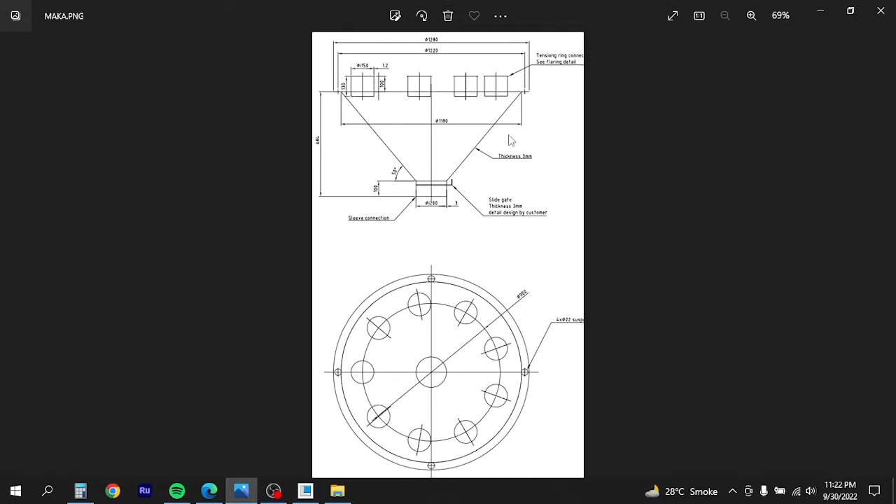Today we are going to discuss how to develop a multiple inlet hopper. As you can see from the drawing, this is our hopper and it has more than one inlet and only one outlet. The idea of this hopper is to collect the product from different points of a bin or any other product source, gather all this product into one hopper, and then discharge it from a single point. This is the drawing for a multiple inlet hopper.

Let's start with the development. This is Creo Parametric 9.0 initial interface. Let's start with new part solid. I will uncheck this and choose MMNS part solid ABS, and I will say OK.

Let's start first with the front plane and I will use the revolve command, and here I will use a center line first like this. Then we will start with the line command and I will prepare a rough sketch here like this.

So this is our drawing. Let's start first with the top cover, whose diameter is 1180. I will take half of it, 1180, so 590 would be the dimension from center to the corner. So this dimension I will change to 590.

Then the total height is 684, and from this point to this point it would be 684 minus 100. So I will take the dimension from this point to this point, which would be 584, and this last one would be 100 from this point to this point. So this one is 584 and this one is 100.

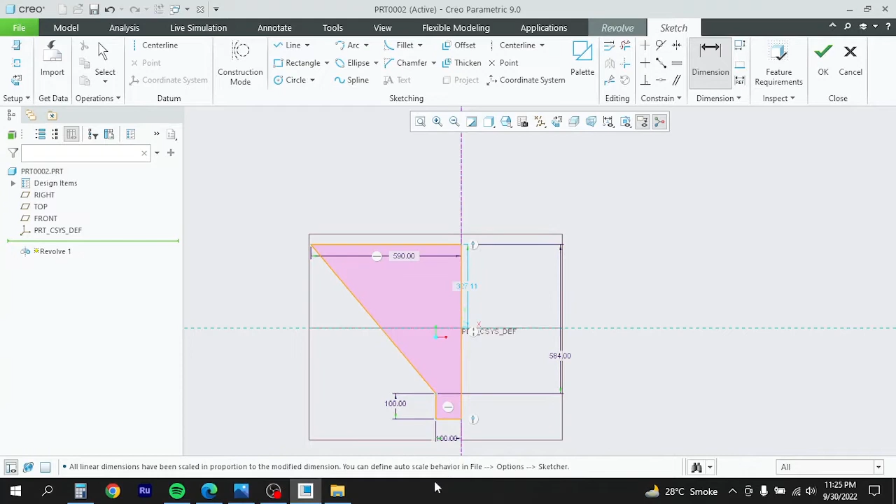So this one is almost complete now. Now I need to see the outlet of this hopper, which is 200, and I will again take the dimension from here to here, it must be 100. So this is now complete, and now I will say OK, and you can see the hopper body is created here, and I will say OK.

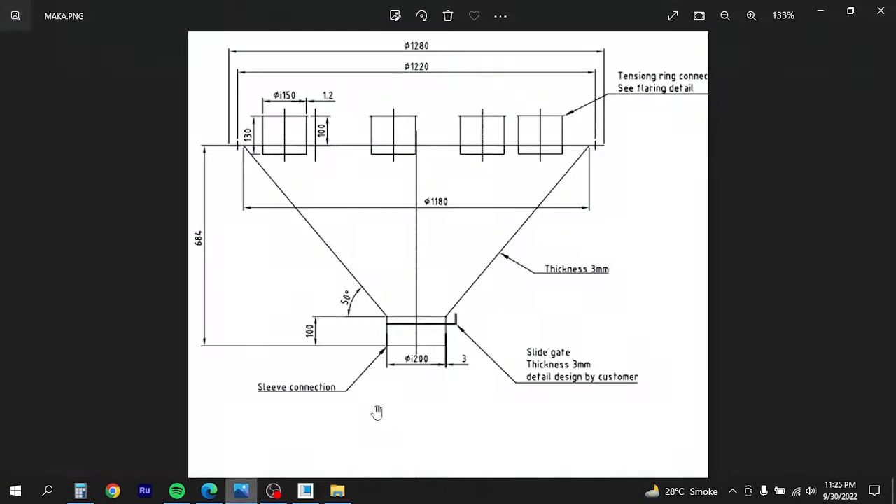Now let's see here, so now we will start with the inlets. You can see we have multiple inlets here, so let's start with the first one. Here are the dimensions: it is 100 outside and 30 millimeter inside. This is the thickness of this pipe, 1.2 millimeter, and the diameter is 150.

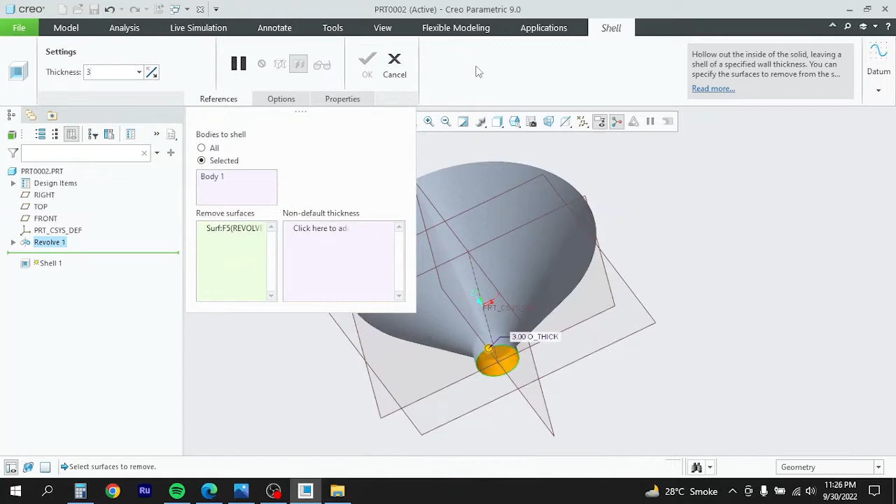So first I would recommend to shell it, and then we will work on the top assembly. First I will shell it from this point, and the dimension of this complete hopper is 3 millimeter. Here I will keep the thickness as 3 millimeter, and I will say OK.

So now you can see it is a hollow body from inside, and from top it is closed, and we will start with the multiple inlets here. So I will choose this plane first, and I will use the extrude command here.

Now you can see from this drawing, at 900 millimeters these holes are distributed. So what I will do here, I will first create the dimension. The diameter here is 900, so from center it would be 450.

So first I will take one circle here, and I will keep its dimension as 900. This will be the center of our inlets. And then I will make a circle here like this, and the dimension of this circle I will keep as 150 millimeter. So this one I can change to 150 millimeter.

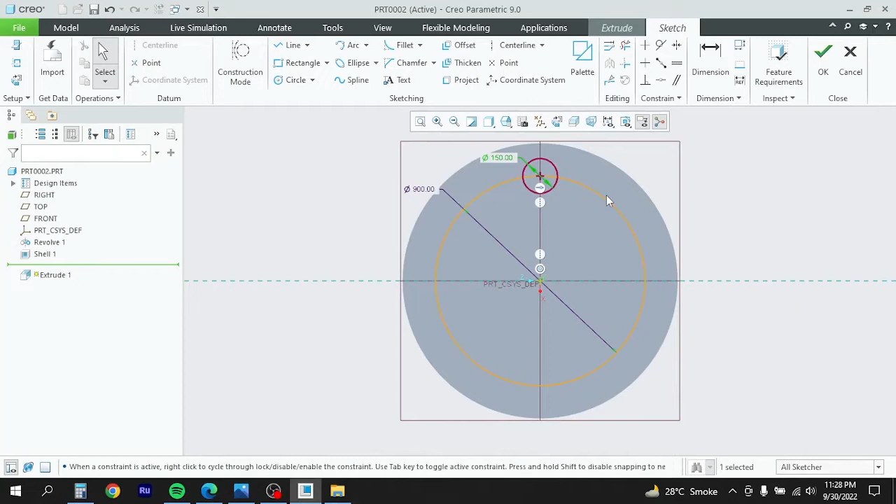So here I will delete this line because I don't need that, and I will use only this circle. So here I will say OK, and you can see it is extruded in the outside direction.

So now I need to know the height of it, which is 100, and the total is 130. So I will keep it as 100 outside and 30 inside. This dimension I will change to 100, and I need this to be hollow from inside, so I will give it the thickness, which is 1.2 millimeter.

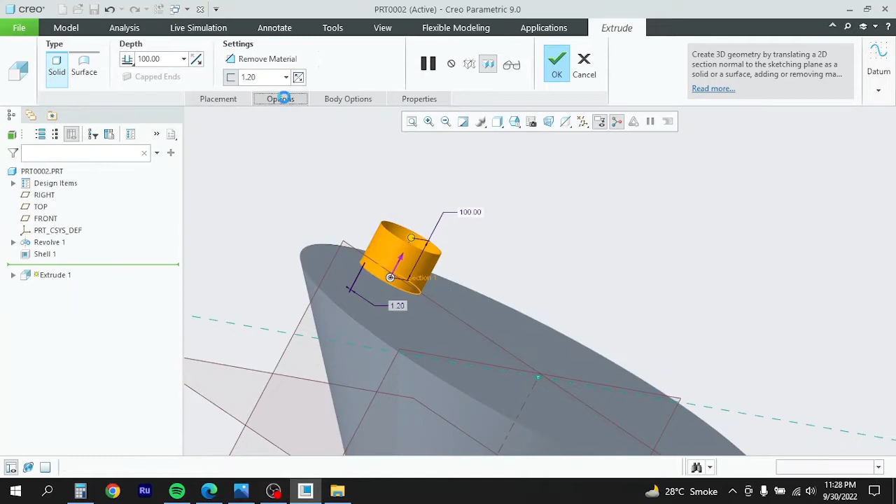Here 1.2 millimeter. Now I need to extend it inside as well, so I will go for option and side 2, and I will choose variable. So here I will give it as 30 millimeter, and I will say OK. So now you can see it is extended outward to 100 millimeter, and from inside it is 30 millimeter. So the hole is created now.

Now I need to make an extrusion here, so you can see the top cover is still in place, so this is actually closed at the moment. Now I need to make an extrude cut on this plane.

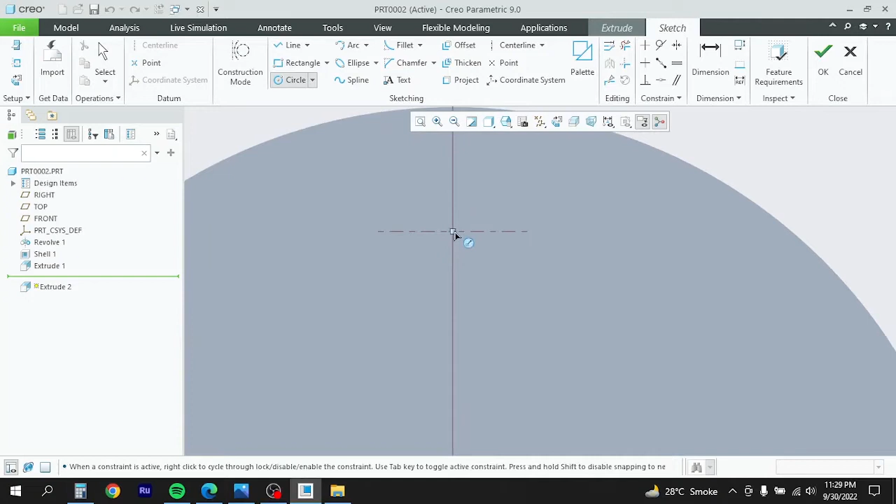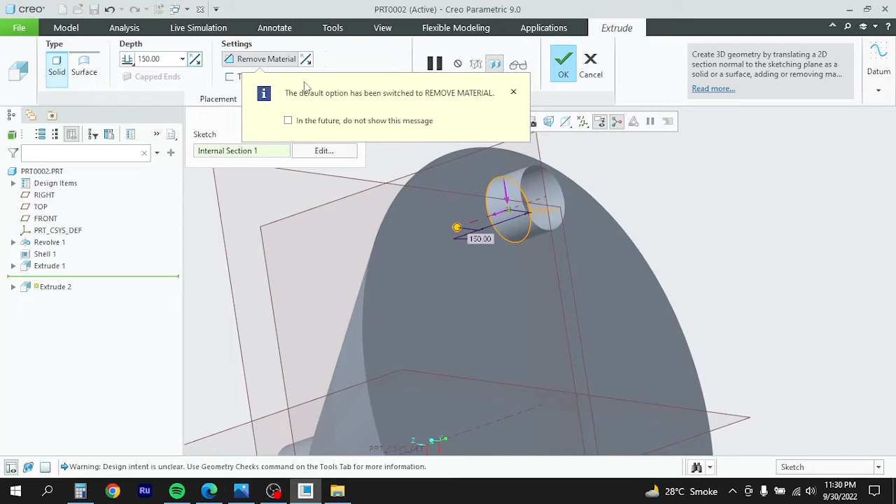I will use the circle command here, and I will make one circle. The diameter of it is 150. So 150, and I will say OK. This one I will flip inside the direction, and I will say remove material.

Okay, so the dimension I will reduce a little bit because the other side is curved. It is actually intersecting here, making a hole here. So I will reduce the height manually because I don't need to go down to the other boundary, I just need to make an extrude cut. This should be fine, so I will say OK. Now you can see the inside is open and the sheet is removed from this area. So this is done now.

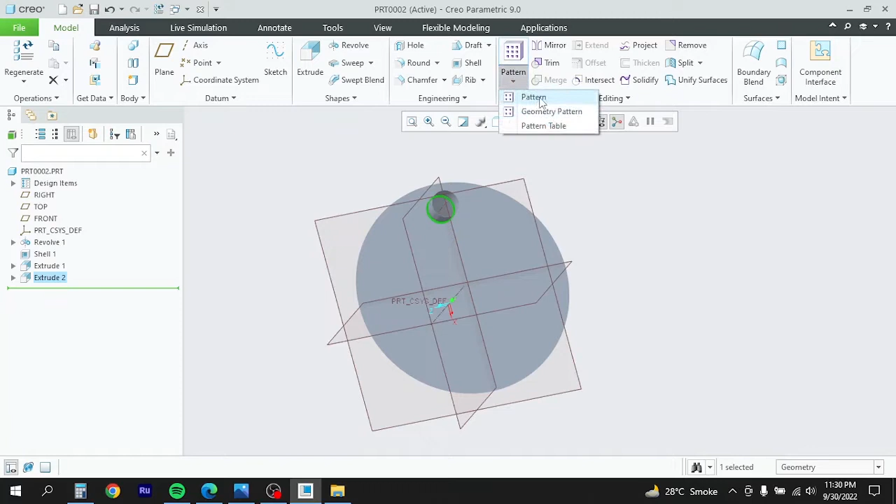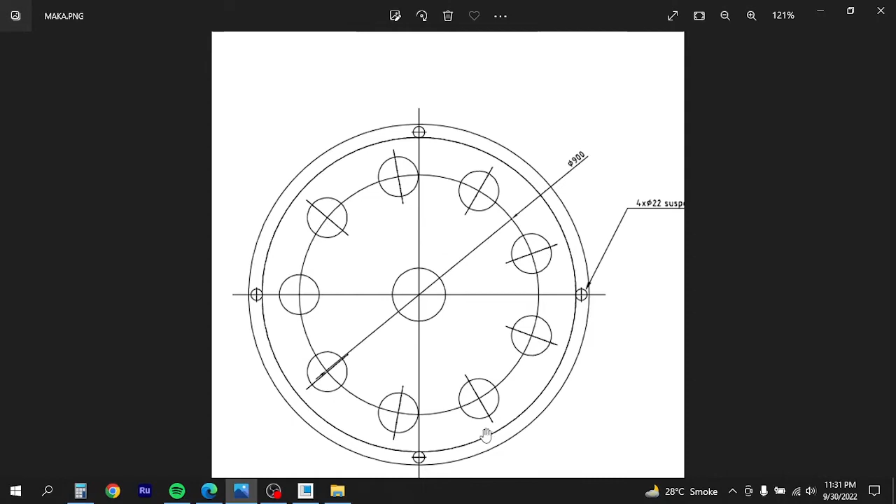Now we will make a pattern here. For pattern I will go to pattern, and the type I will change to axial. Now I need to choose the axis, so this is my center axis. And this I will change to angular extent 360. Now you can see here the number of members: 1, 2, 3, 4, 5, 6, 7, 8, 9. So total we are having 9 holes here. So I will say 9 here, and I will click OK.

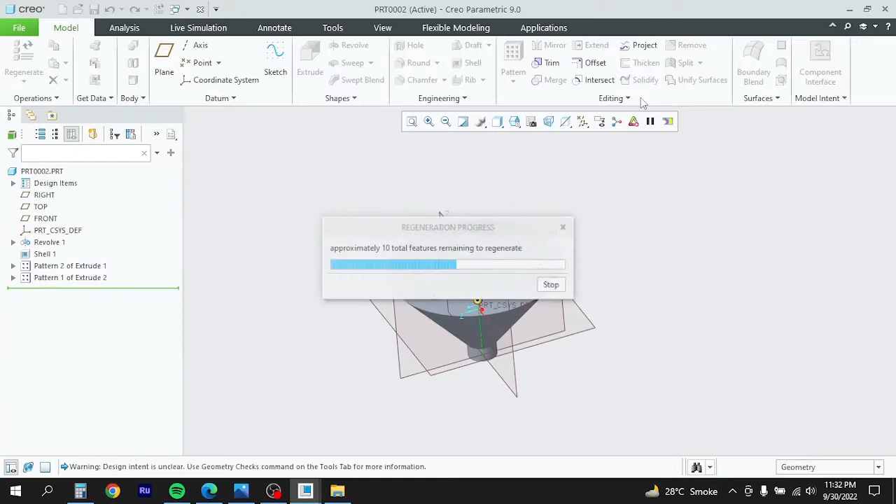Now you can see only one pipe is created and the other ones are not done, because we were doing the extrude command for extrude 2. So now I will choose this pipe, or the extrude 1 command, and apply the same thing. Axis, I will choose the center axis, choose angular extent, and change this to 9, and I will say OK. Now you can see all the pipes are in place, which is fine now.

Now we are having multiple options how to make the assembly from this point. Normally we are having an additional flange here, and we are having three or four supports here to hold this multiple outlet hopper in place. So for that we will make a flange type assembly on the edge of this multiple outlet hopper to place a support here. So for that I will again use the extrude command.

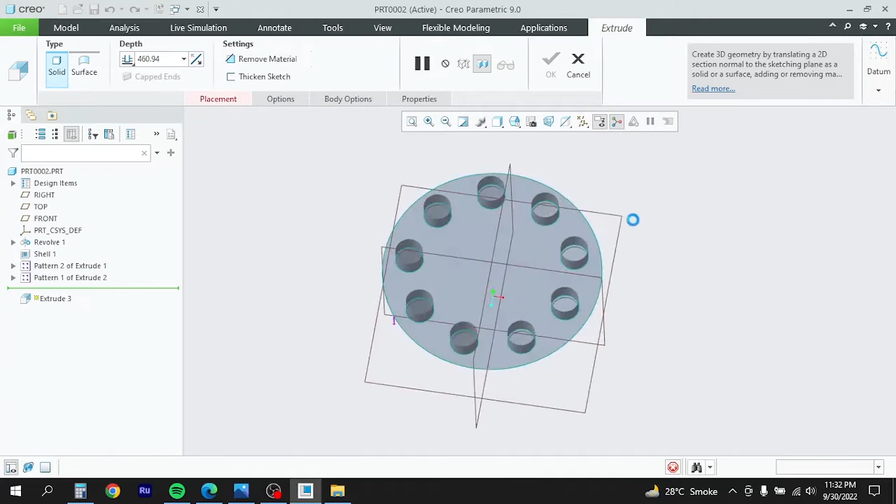I will choose this plane, and here I will draw a circle like this. So the dimension of this circle would be equal to 1180. As I said earlier, I wanted to make it a little bit offset, so I will choose this dimension 1280. The outside is 1280, and I will say OK.

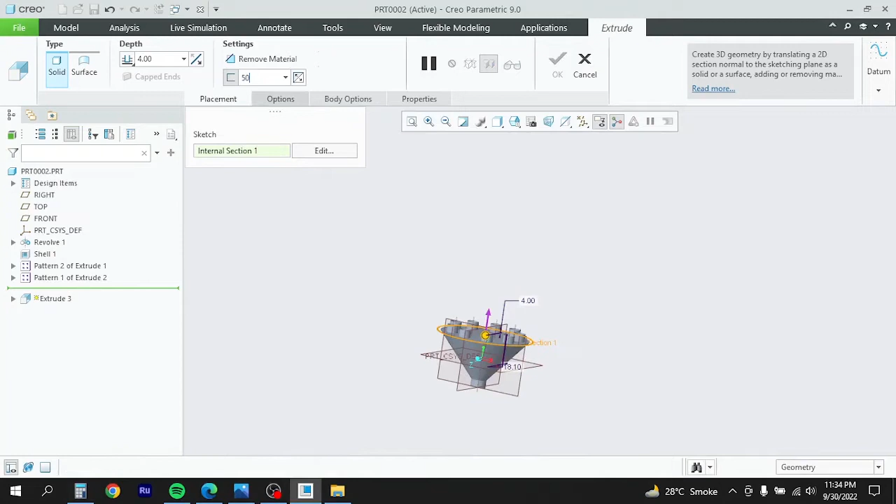So here you can see this is created now. Now this height would be the thickness of my flange, so I will say 4 millimeter would be the thickness of the flange, and here I will choose this one. So 1280 is the outside and 1180 is the inside, so we are having a difference of 100 millimeter, so one side would be 50 millimeter. You can see it is created now on the outer edge of the hopper to hold the multiple outlet in place by using multiple supports here. So this is done now.

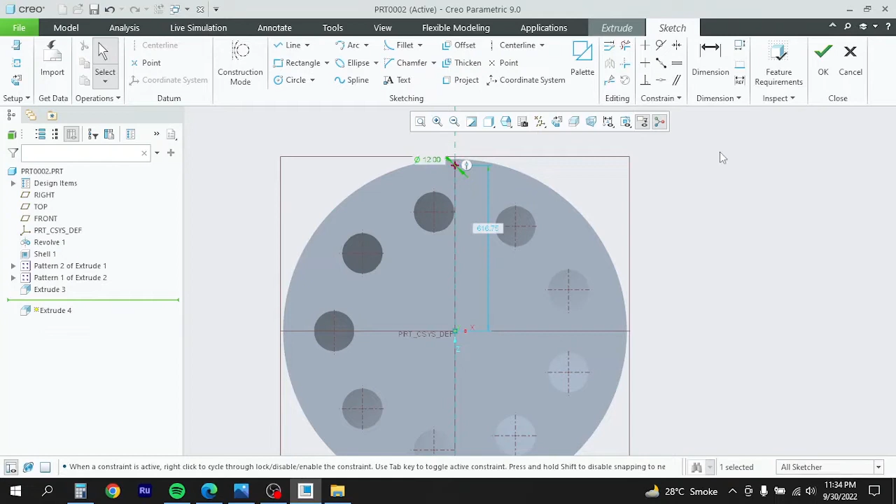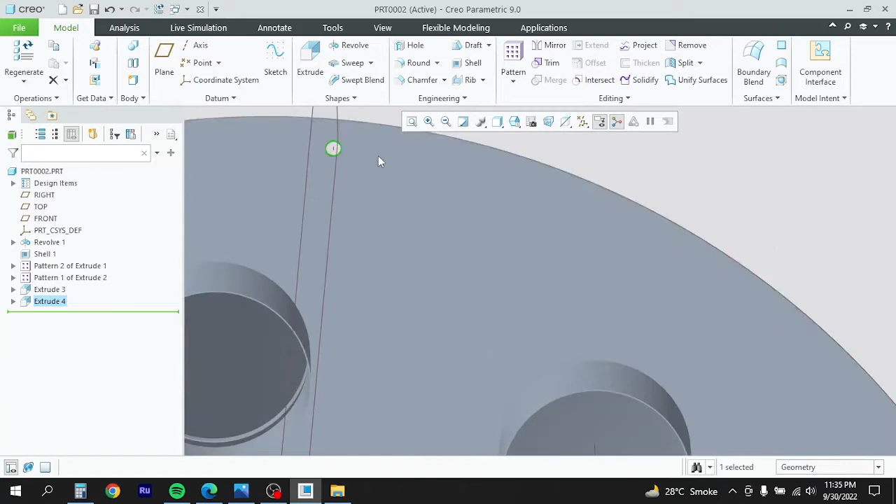Now as I said before, we need to make some assembly here for preparing the supports for this multiple outlet hopper. So again I will choose this plane, and I will use the extrude cut, and then I will draw a circle here. This dimension would be 12 millimeter, should be fine, and I will say OK. So this one I wanted to keep as a hole, so I will flip the direction and remove material here, so which is already chosen, so I will say OK. So you can see the hole is created now, which is M12. So this is OK.

So now I will repeat this as pattern. I will again go to axis, and choose the center axis. I will choose angular extent, and number of members 4 are fine for us, so I will say OK. So now you can see 4 holes are created here.

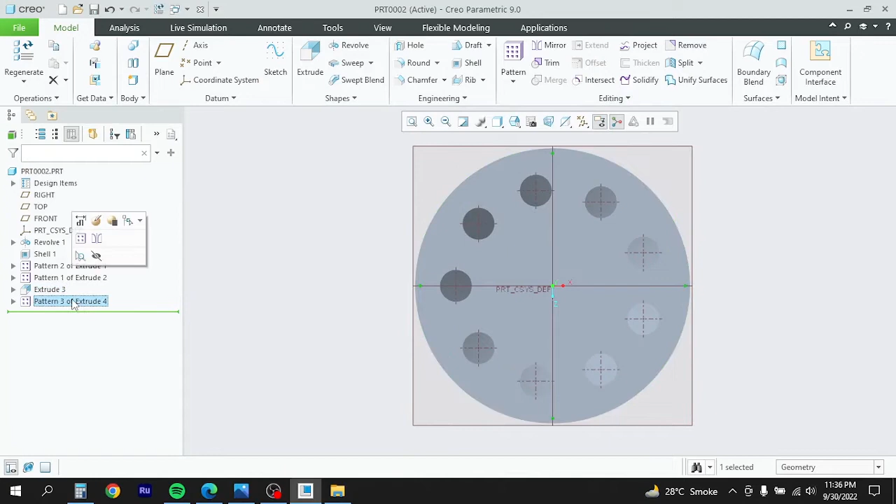Just to have a better overview, I would like to change this hole dimension. This one I will edit the definition, and here... OK... OK. So this is fine, we will keep it like this, and the holes are in place.

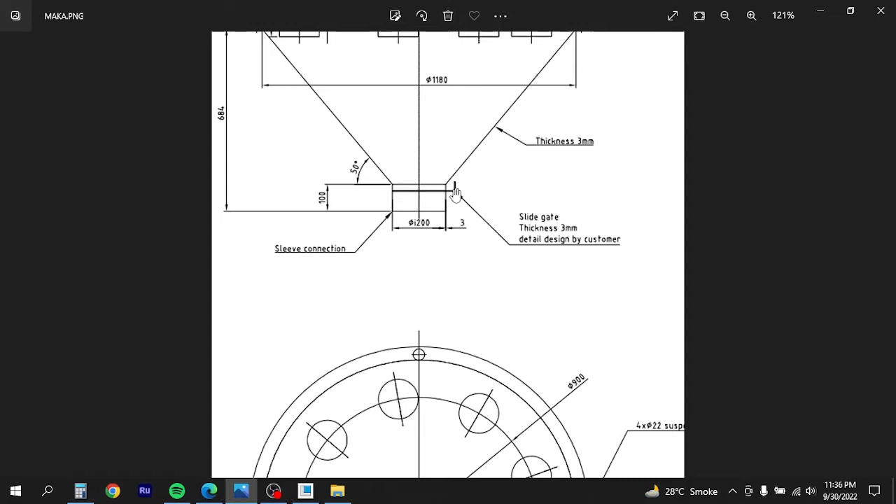OK, so now let's look at the drawings. Here we need a slide gate of 3 millimeter, and it is actually used to open and close the outlet of this hopper. So let's prepare that.

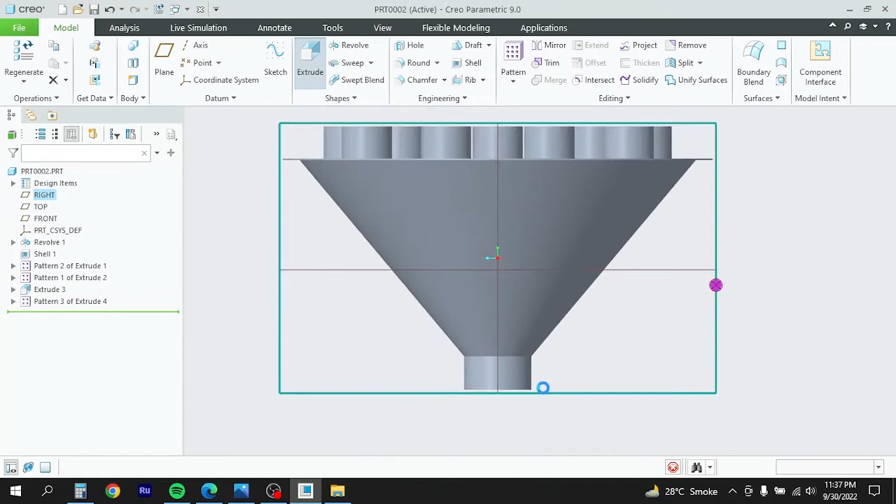For this I need an extrude cut here, so I will choose any of these planes, this one, and I will choose extrude command here, and I will make a rectangle starting from this point to this point. Okay, so this dimension I can change to 5 millimeter because 3 millimeter is the thickness of the plate, so the rest is okay. So I will say okay. So here you can see it is extruded on one side.

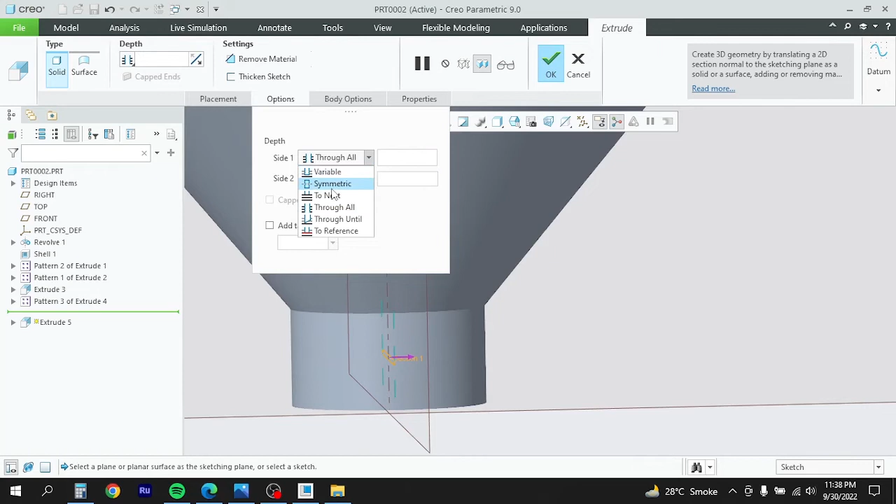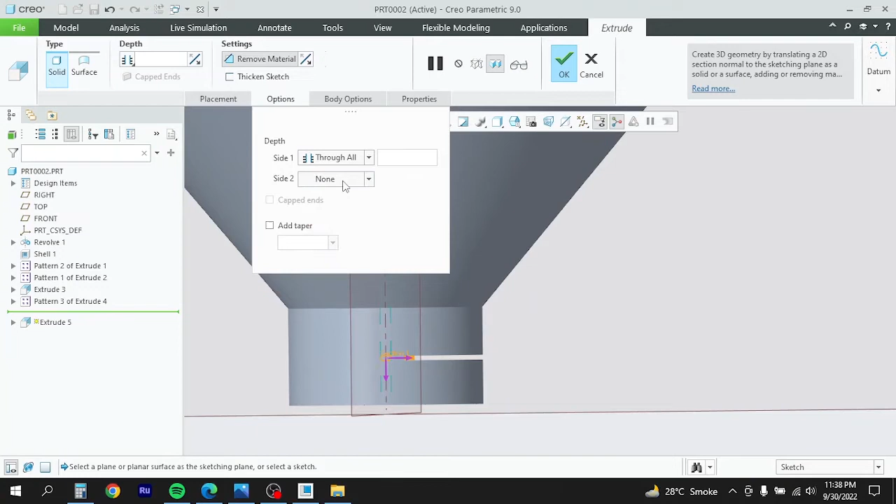Then I will go for option and choose variable here too. And this one I can say to the next, and this one I can say through all. Yes, through all, and I will remove material. Okay, so this one we can set as variable. Okay, so since it is hollow from inside, we will keep it as none, and this one we can say through all, and I will say okay. So now you can see the slot is created for the discharge slide gate. So this is fine now.

Now let's move to the slide gate that we will prepare separately, and we will prepare the supports in another window.

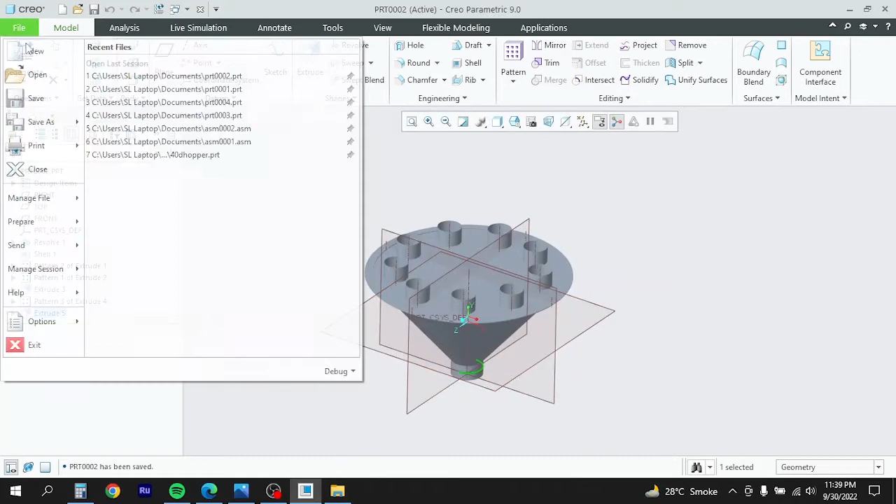Okay, so I will save this at the moment as part number 2. Now I will go for a new part, and here I will uncheck and use MMNS part solid ABS, and I will say okay. Here I will choose the front plane. Simply I will choose the extrude command. From here I need to draw this slide gate.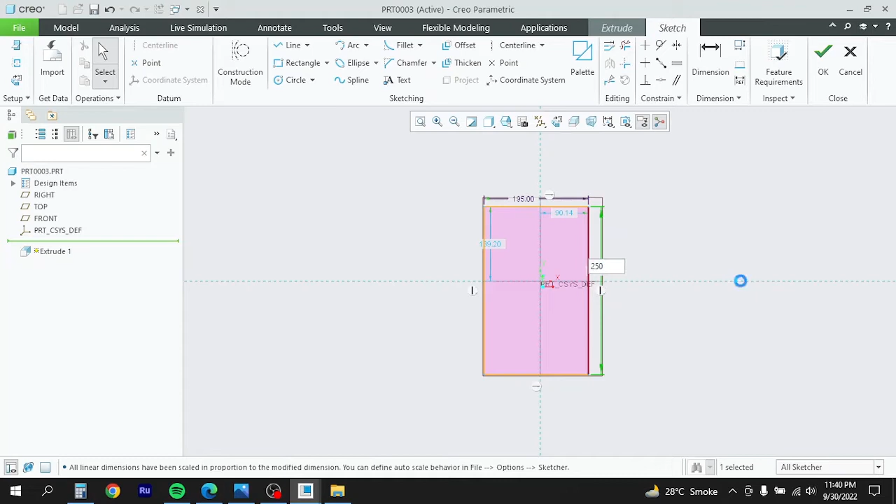So roughly, 200 is the length, and it is slightly outside, so I can say it's roughly 250 millimeters, and then we have a slight bend here. Let's make a rough sketch. This one would be slightly less than 200, so 195 would be the width of that plate, and this one 250 millimeters. I'll say okay, the height 3 millimeters, and click OK. Here you can see the slide is created now.

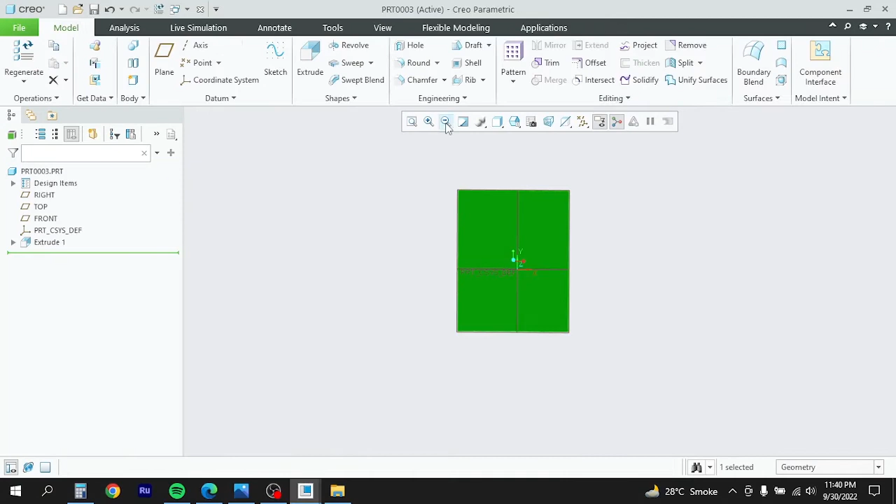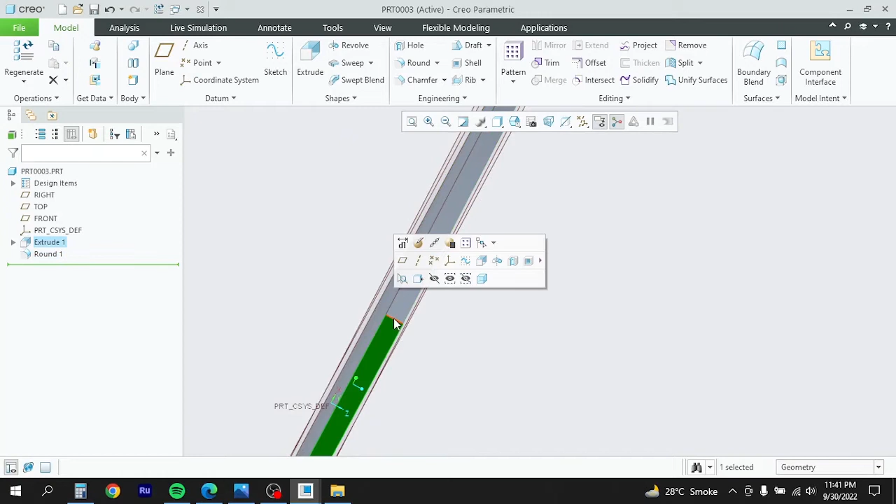Okay, so now we need to round these edges. This one I can choose and say round. This one I can keep as 250 or 200, and I say okay. The other one also, I can choose this point and say round here, again 200.

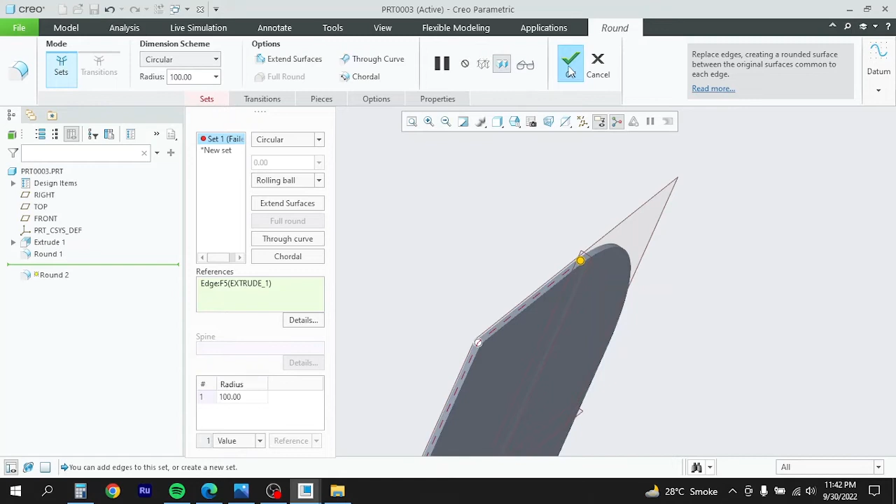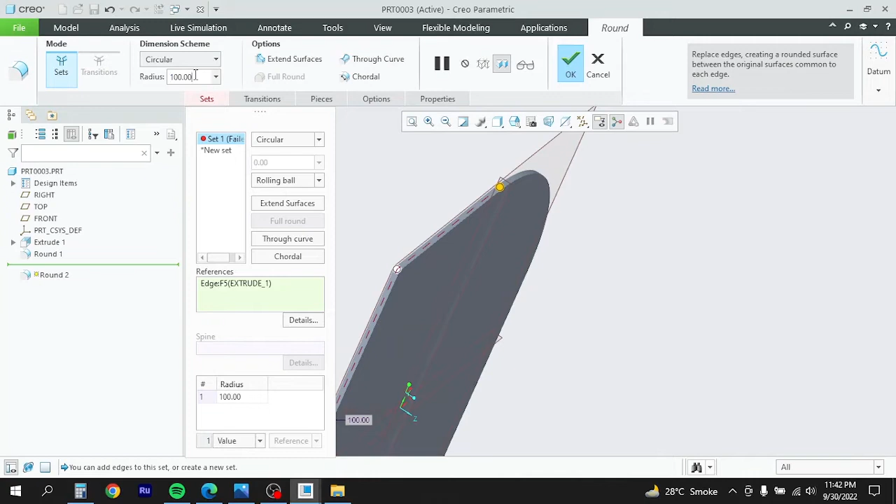Here we need to make a round of 100, and this one also, because the diameter of that pipe is 200, so this round would be 100, which is half the diameter of the pipe. So I will say 100 here, and okay. Now I will round this point again and say 100, or 95. Now you can see the plate is created.

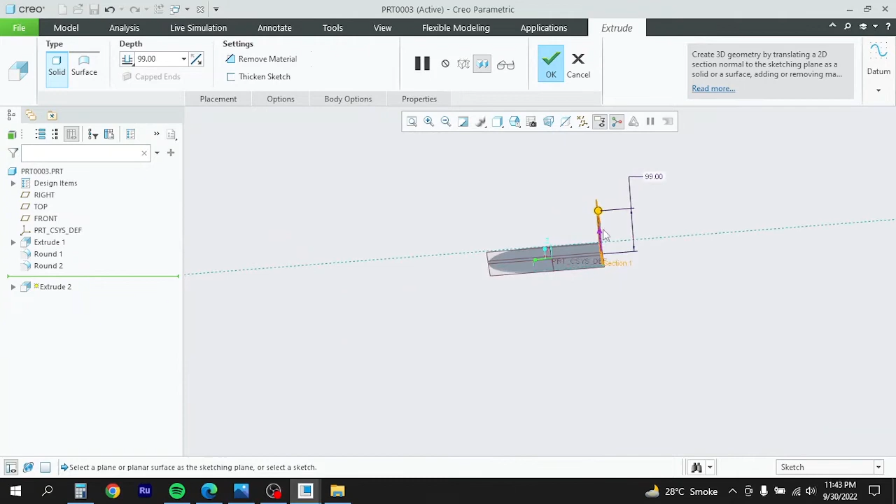Now we need to make an angle here. I will choose this plane, again extrude, and make a rectangle from this point to this point. This thickness I will keep as 3 millimeters and say okay. This one we need to extrude to an optimum dimension, which I can set manually. This should be okay, and I click OK. This is our insert plate, which would be inserted at the bottom of the multiple outlet hopper. I can save this as part number 3.

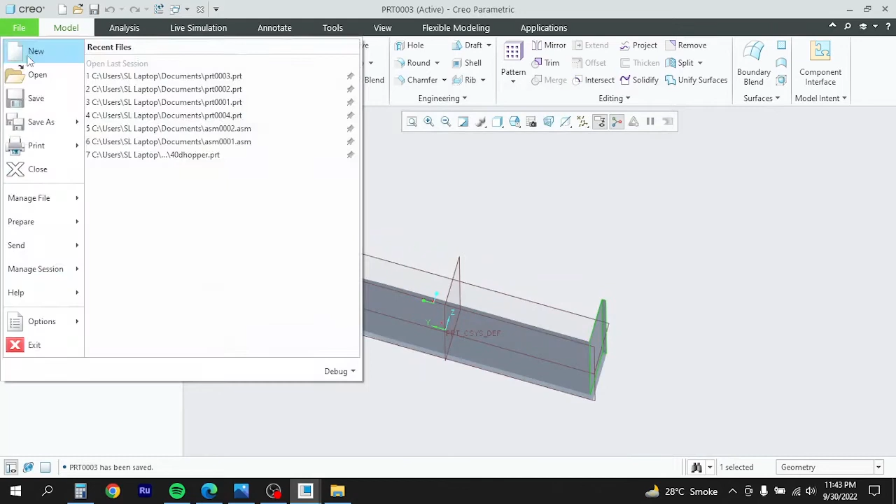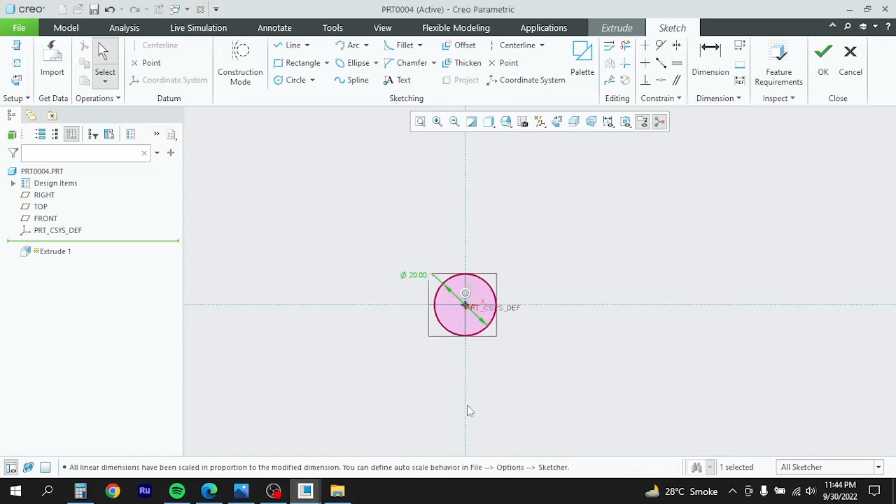Now let's go to the last one, new part solid. Here I will uncheck and use MMNS part solid ABS. Now we need to make the supports of our multiple outlet hopper. I will choose the front plane, again extrude command. First I will draw a circle, with a diameter of roughly 20 millimeters, and say okay. The height of this support I can keep roughly at 1400 millimeters, or change it to 1000 millimeters for better aesthetics. So I will say okay.

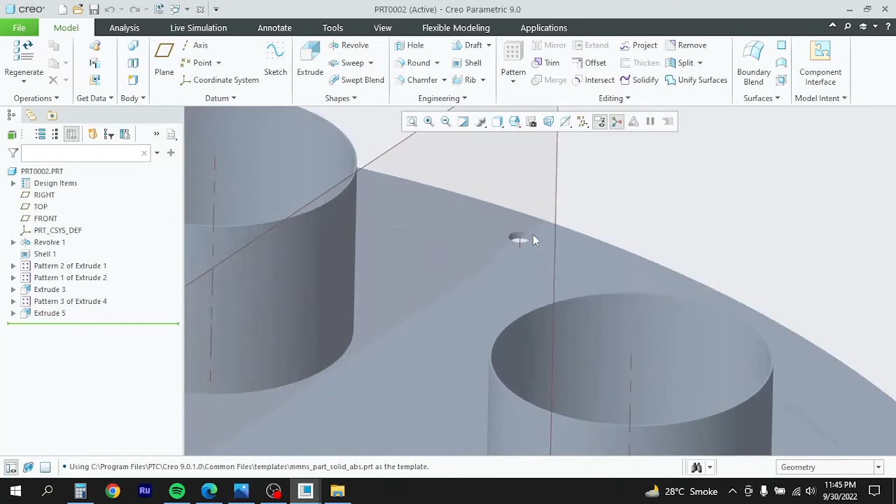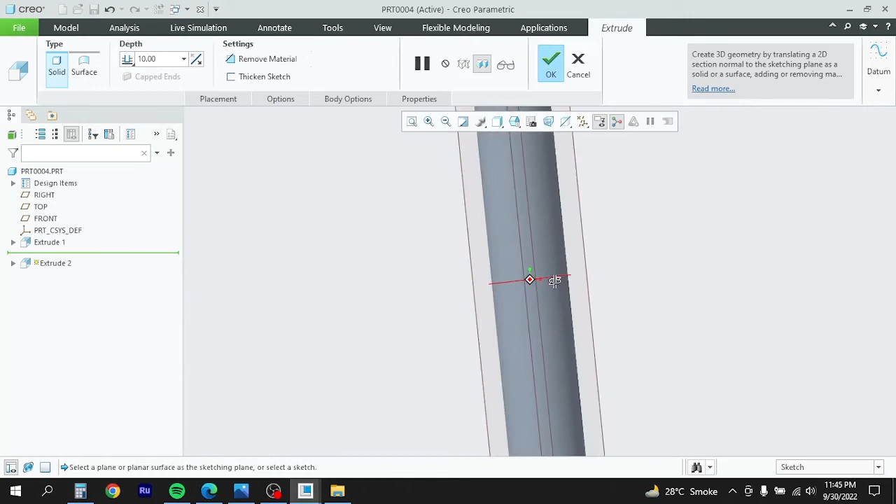Now I will select this plane and make a bolt which would fit in here. The hole we created was M12, so we will prepare an assembly that is at least M10. I choose extrude again and use circle. This diameter would be 10 millimeters, slightly less than M12, and I say okay. This bolt length I can change manually, but for an exact dimension, 60 millimeters should be enough, and I say okay.

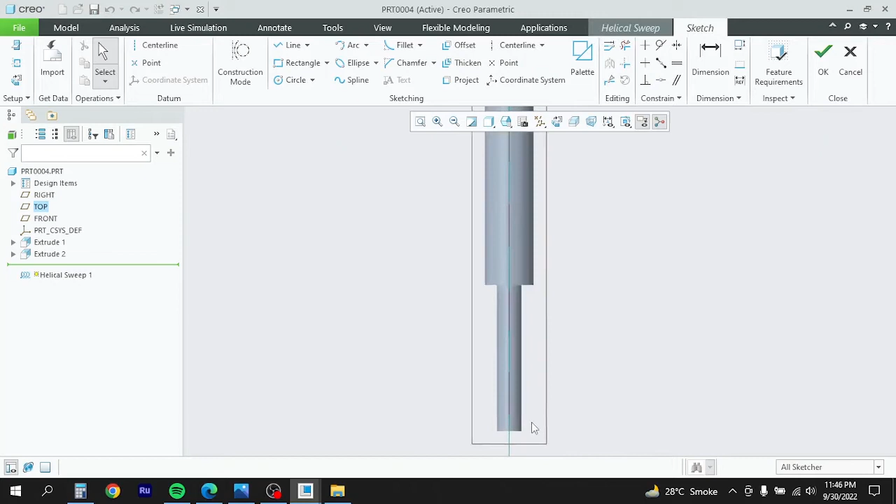Now we need some threads here. To prepare the threads, let's first choose this plane and then go for helical sweep. I choose this plane for helical sweep. Now I need to make two references first, this one and this one, the center line. Once this is done, I need a line for the threads from this point to this point, and I will say okay.

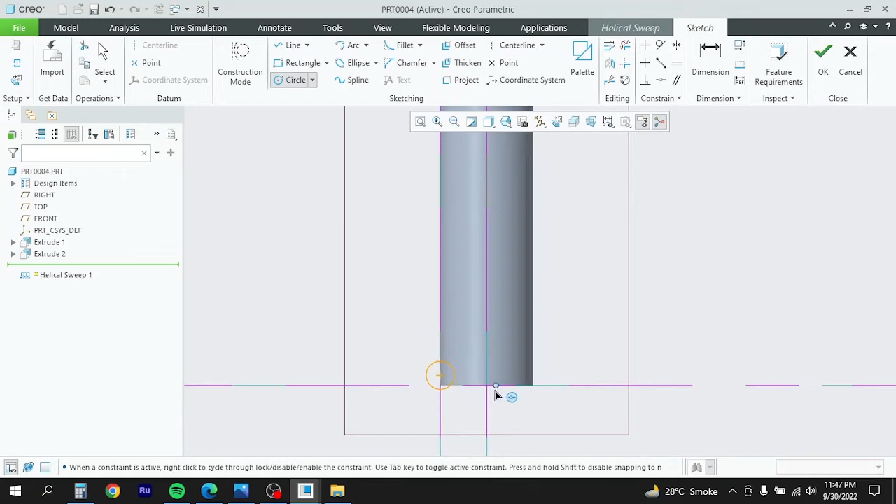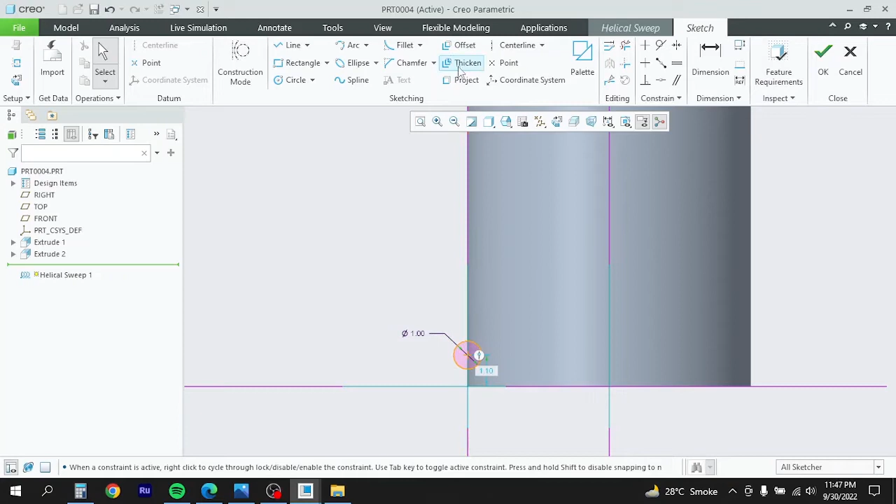Here I will choose sketch and draw a circle like this, and this one I can say 2 millimeters, or 1.5, or 1 millimeter. Then I will trim the unwanted part like this and close the loop. Once this pattern is created, I will say OK, and you can see the threads are created now.

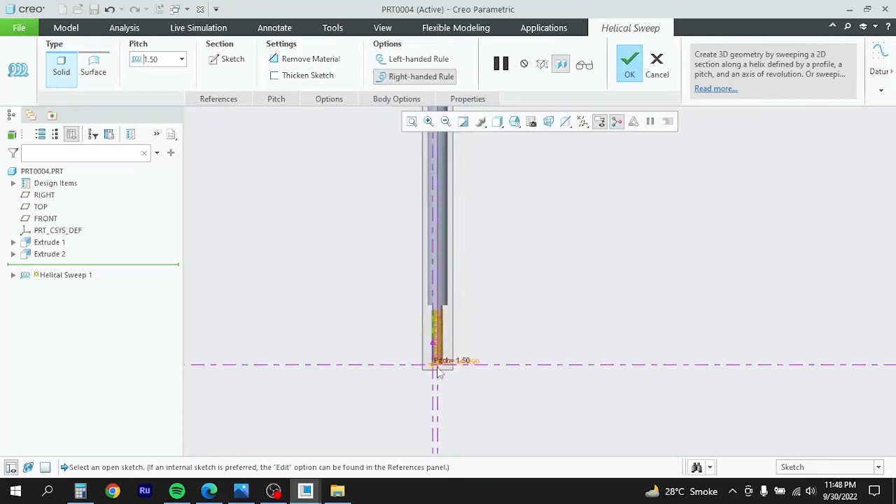Now I can change the pitch here, let's say 15. Let's say 2. Okay, 2 looks fine to me. Let's change it to 1.5. This one is also fine, and I will say OK. You can see the threads are created here.

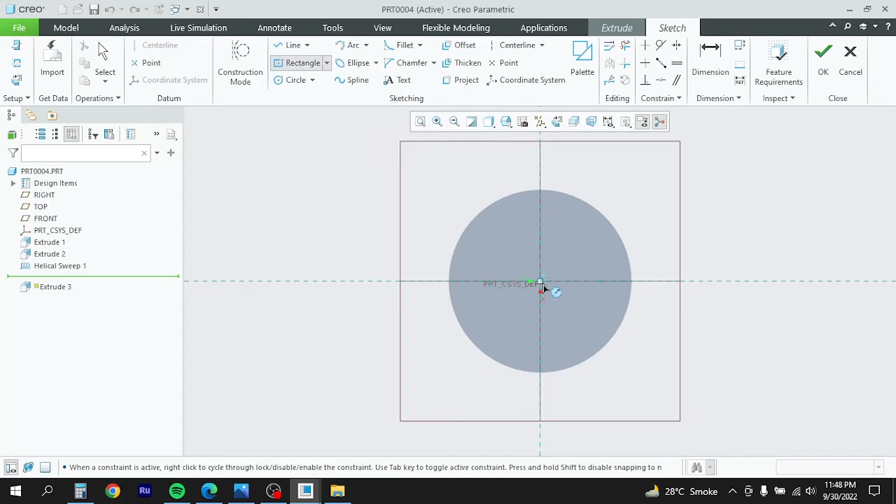Now we need a base plate here. For the base plate, I will choose this plane, again extrude, and draw a circle here, or rather a rectangle. This center rectangle looks better. So I will prepare it somewhat like this, and say OK.

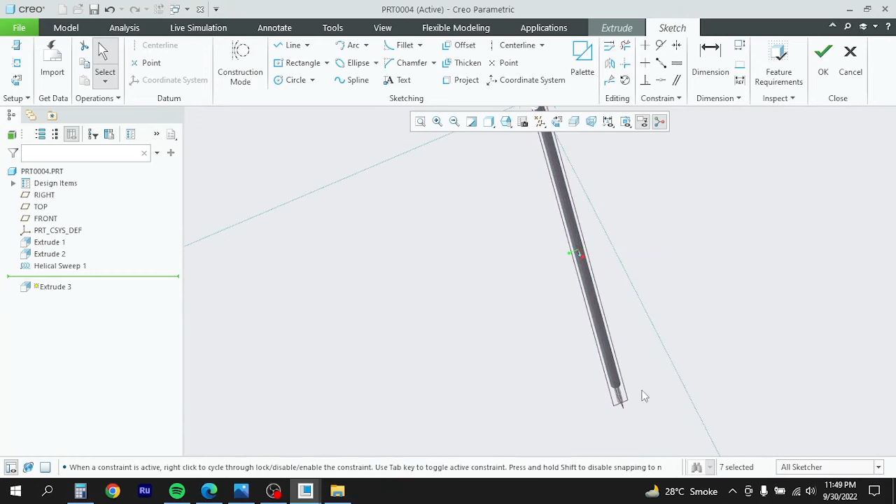So here we have threads here, and we have this angle here. So the dimension I would like to change to 100, and this one I can say 50 millimeter. So this looks fine now. I will say OK. This thickness I can keep it as 4 millimeter, and I will say OK.

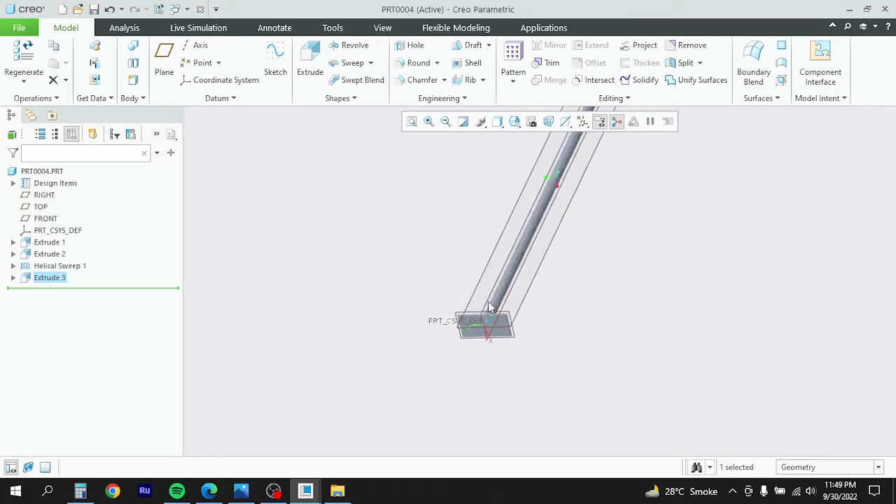OK. So now I would like to select this one, and I will choose this corner, and I will round them. So this one I will change it to 20, and I will say OK. So this round we can... OK. So let me see the dimension again. We keep it as 20.

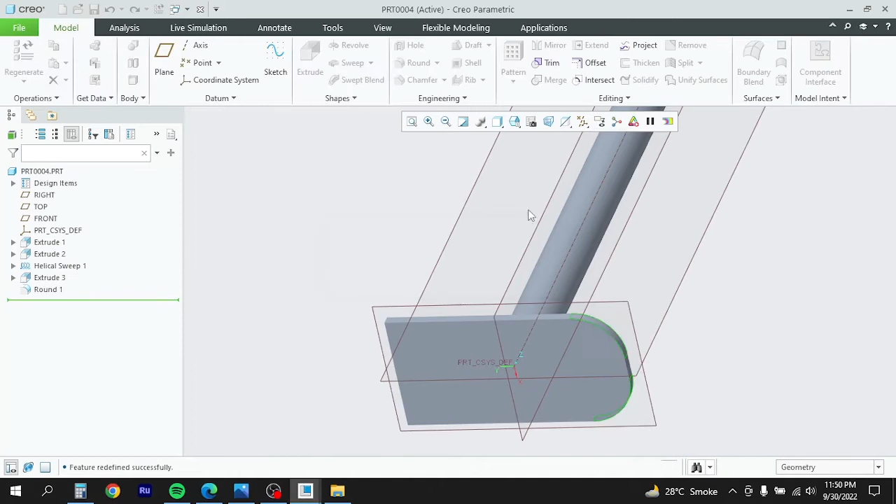So I will follow the same for this one, and this one, and I will say OK. So you can see the support is created now. Now I need to make 2 extrude cuts here for the anchor bolts or fisher bolts. So I will create a round here like this, and this one M14 should be OK, and I will say OK.

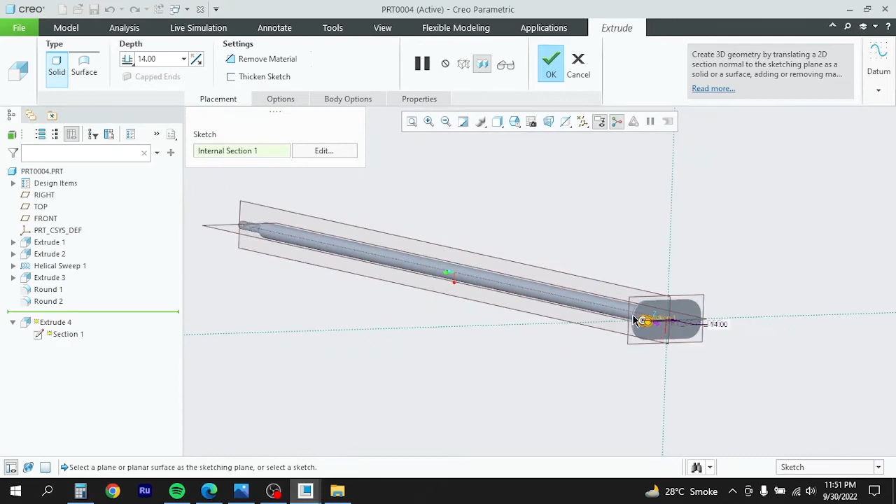Okay, so this one I would like to change the direction, and I will remove material, and I will say OK. So the same extrude I will simply mirror to this plane, and then we are having 2 holes for the fisher or anchor bolts. So the support work is done now. Now let's start with the assembly. So I will first save this file as part number 4, and I will go to new assembly, and I will click OK.

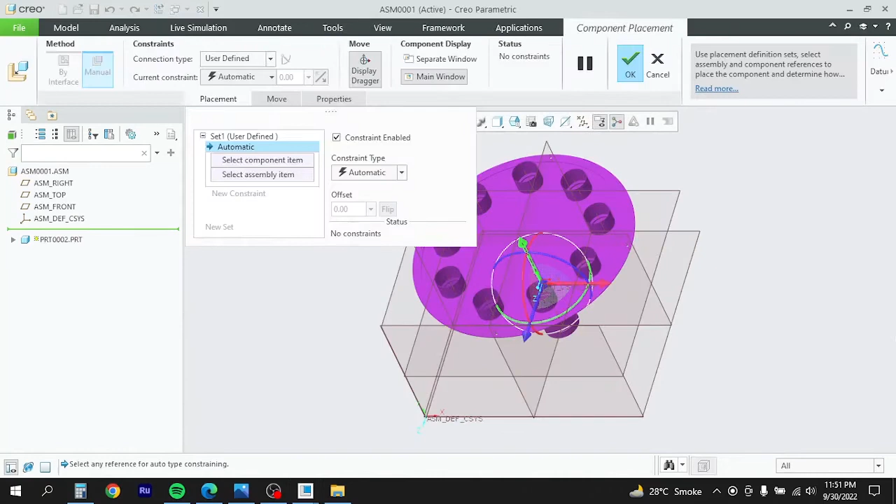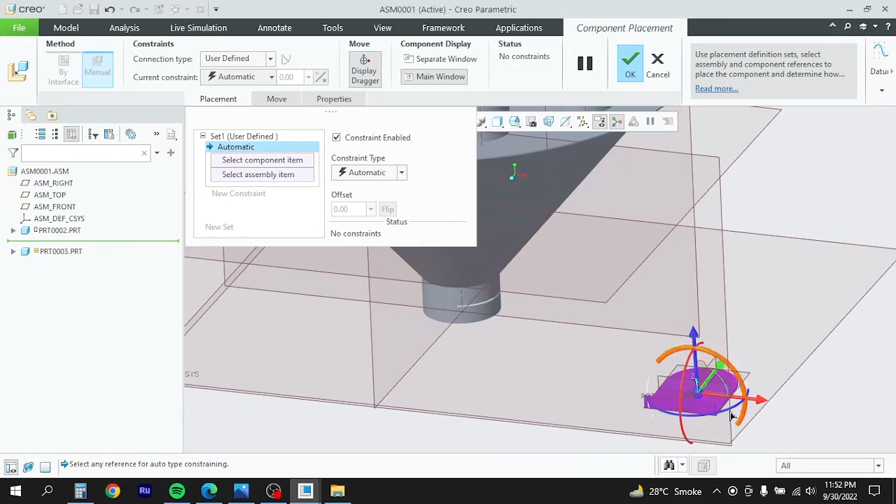So here first I will bring the part number 2 in, which was our multiple outlet hopper. So this is OK. So then we need to insert the slide here inside. So I will go again to the assembly, and this is our slide gate, which I will rotate it like this, and then I will rotate it like this. So this face of the plate I will coincident it. So this will be the first point, this one, and this should be coincident with this plane.

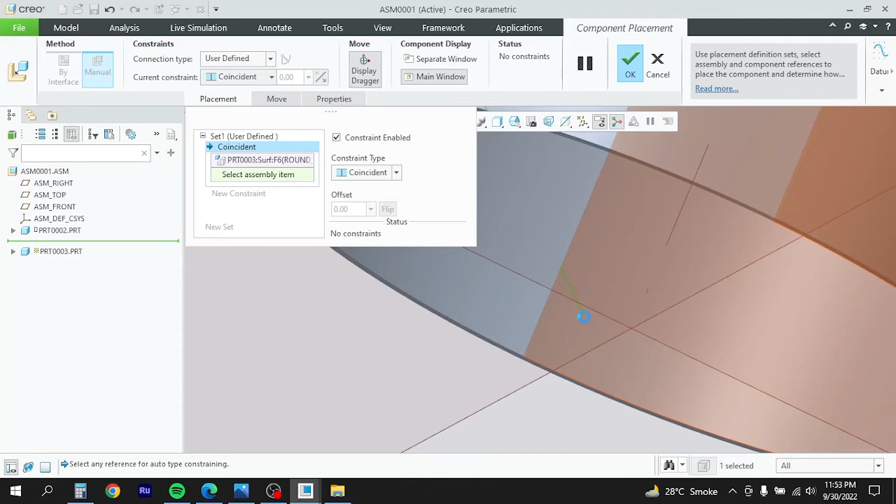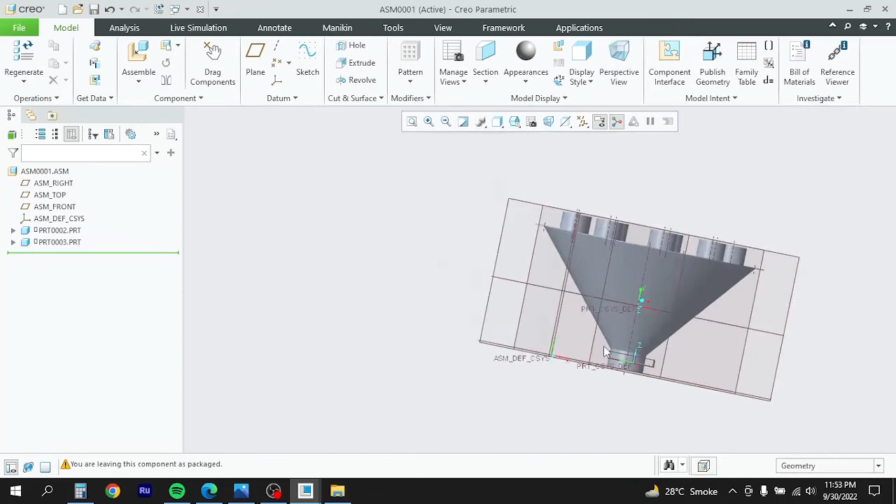Okay, so you can see the plate is inserted inside. Now we can simply make their planes coincident, or I can simply change its position like this, because we forgot to make another plane here to make them coincident. So we can simply move it manually just to reduce the work and complete the job. So here you can see it is done. So I will say OK. So you can see the slide is inside.

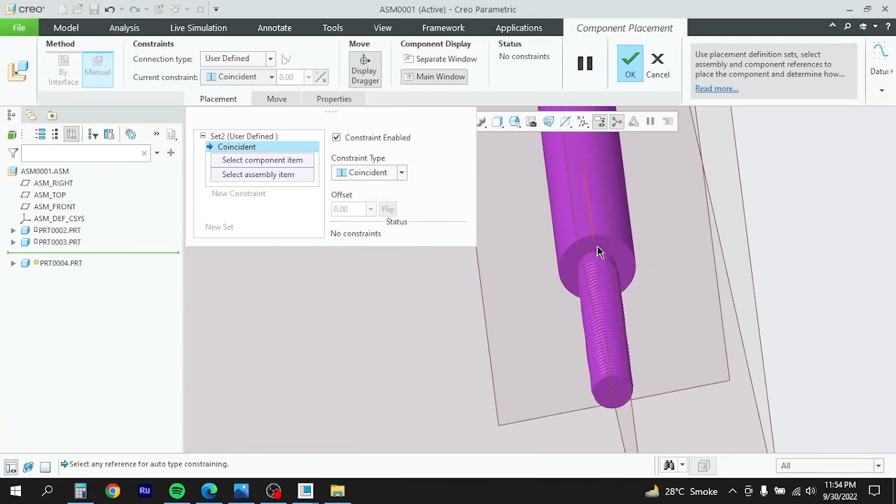Now we need to add our supports in 4 corners. So I will go again to the assembly, and I will use coincident first, and then first I will choose their axis. So this is our center axis. This should be coincident with the axis of this one. Okay, so this one I can simply rotate it. Okay, let's do it again. So let's take the assembly inside, part number 4. So this is in the correct dimension now.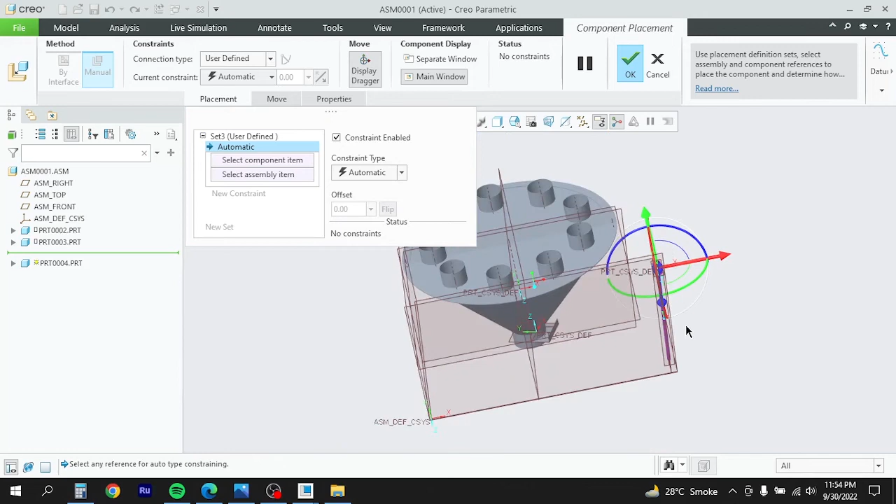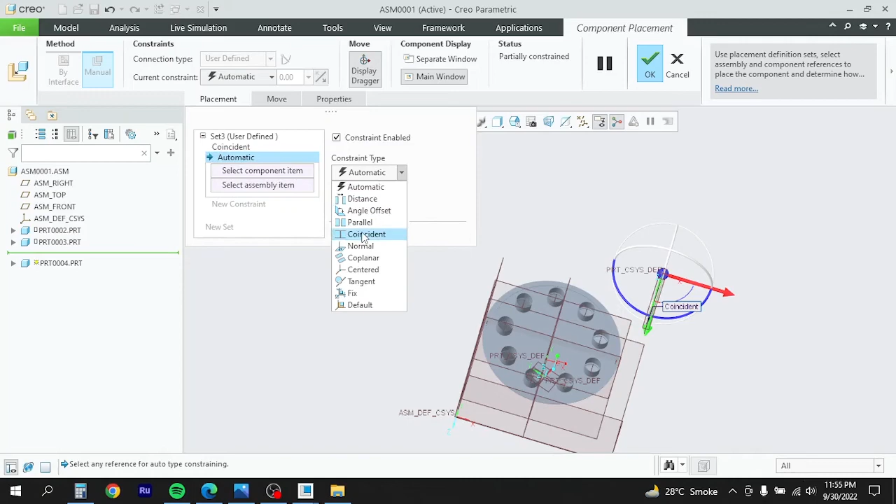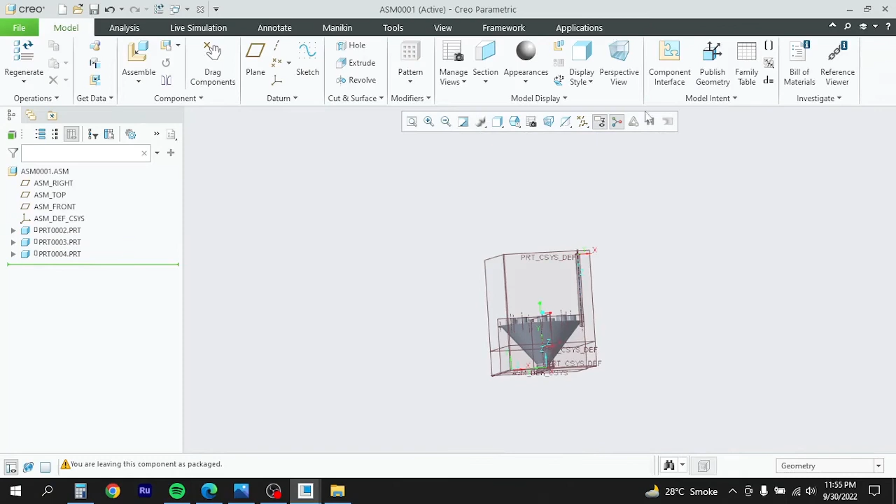So what I will do, I will simply, okay, so this is the threaded part, so I will simply rotate it in this direction. Okay, so I can make this face, this one. So let me set the first coincident constraint for this one should be sitting at this one, and then I will add a new constraint, again coincident. So this one should be here. Okay, so this is done now.

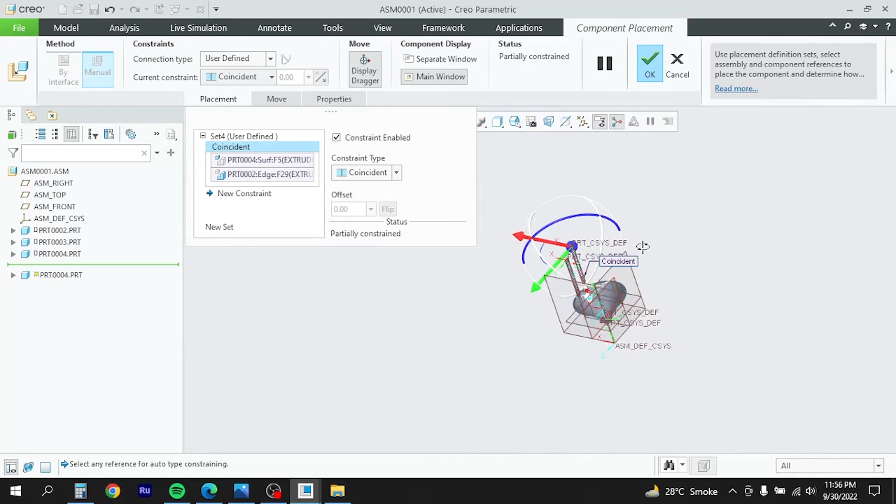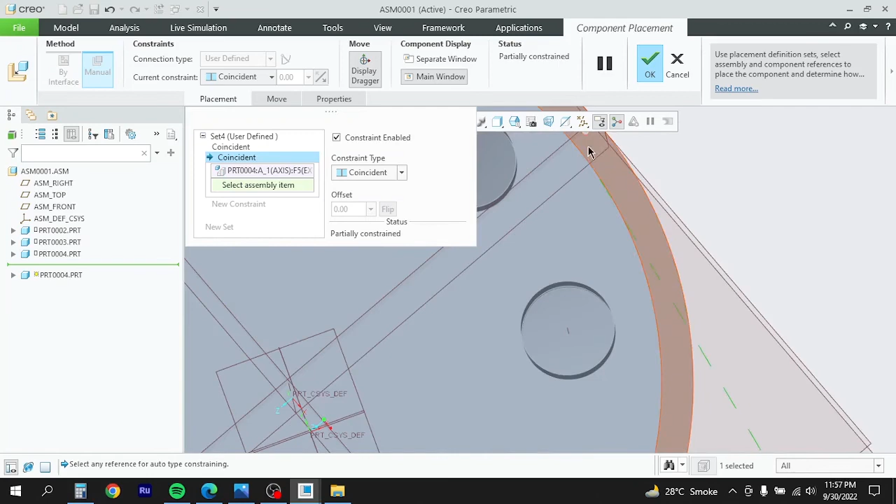Now we need to add more supports on the remaining one. So assembly part number 4. So again we will simply rotate it like this, and then our first constraint would be this face, and the other one this face. Now we need to make a second constraint, again coincident, and this would be the axial one should be matching with here. So the second support is also installed.

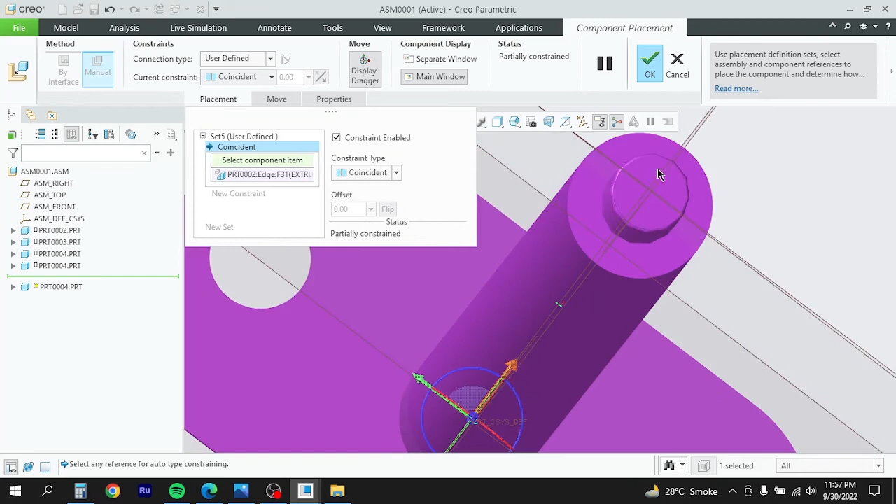Now let's go for the third one here, and I will say OK. Assembly part number 4, coincident. So this is our face, first part of coincident, and then let's rotate it first. Then I will choose this face. Okay, so now we need another constraint here, coincident, and we will be making its axis as coincident.

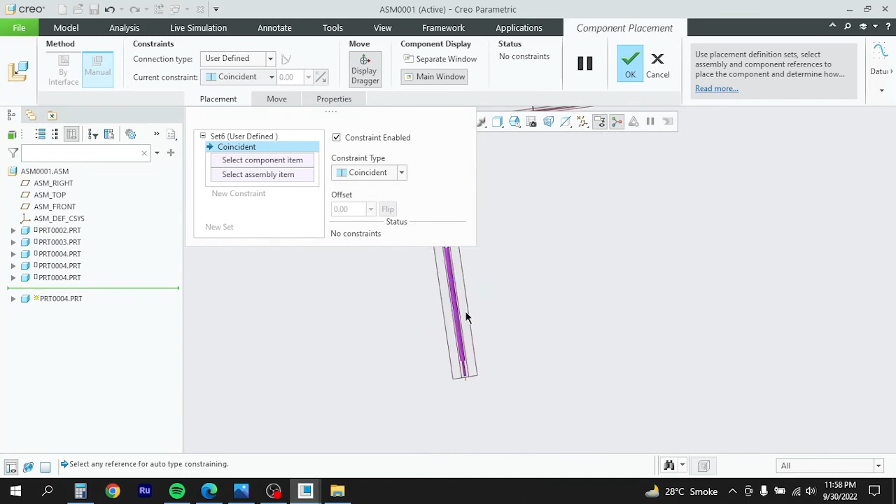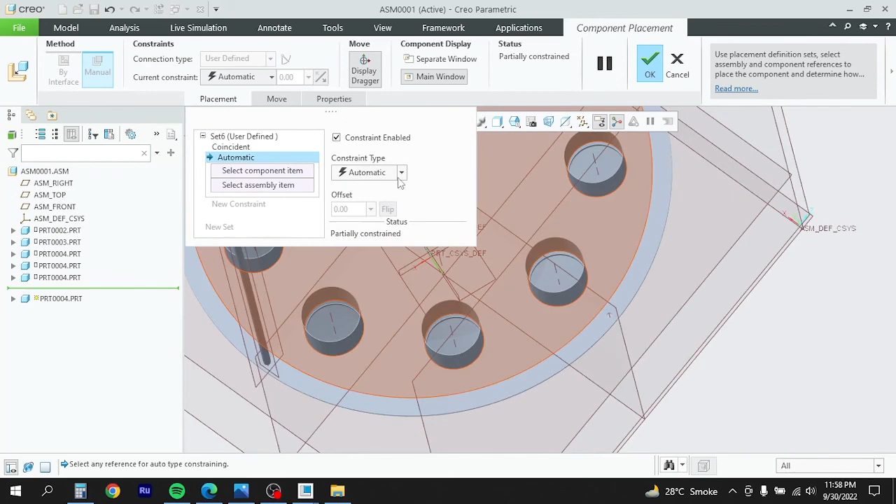Okay, now let's go for the last one, assembly part number 4, coincident, and then I will flip the direction, and then I will choose first this plane should be coincident here. Okay, and then the second constraint would be from this axis to this axis, and I will say OK. So now you can see all supports are in place.

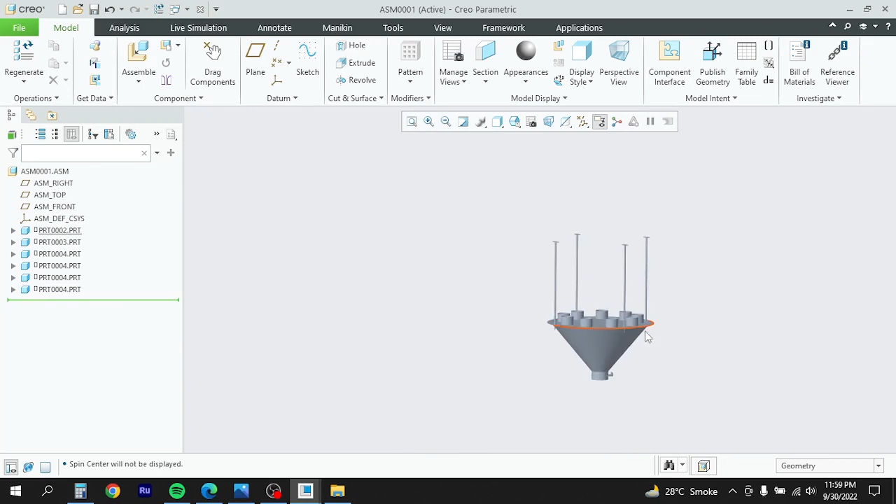I will simply turn off these all, and I will turn off this one as well. Okay, so this is our multiple outlet hopper Maka, and this is done now. You can see. So we need to install some bolts here, which we will do in the next section because the video has already gone more than the estimated limit. And here also I need an opening here, that would be only to check the product, so that is not mandatory, or that is not very necessary. So that's all for Maka.

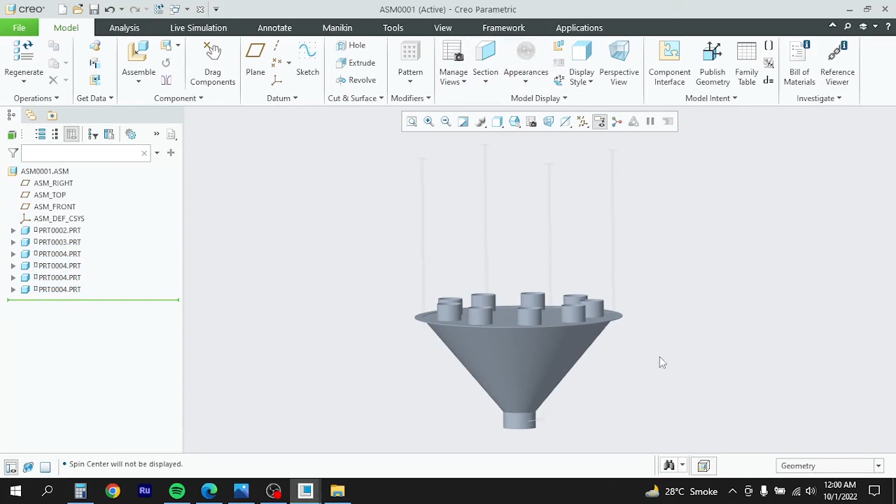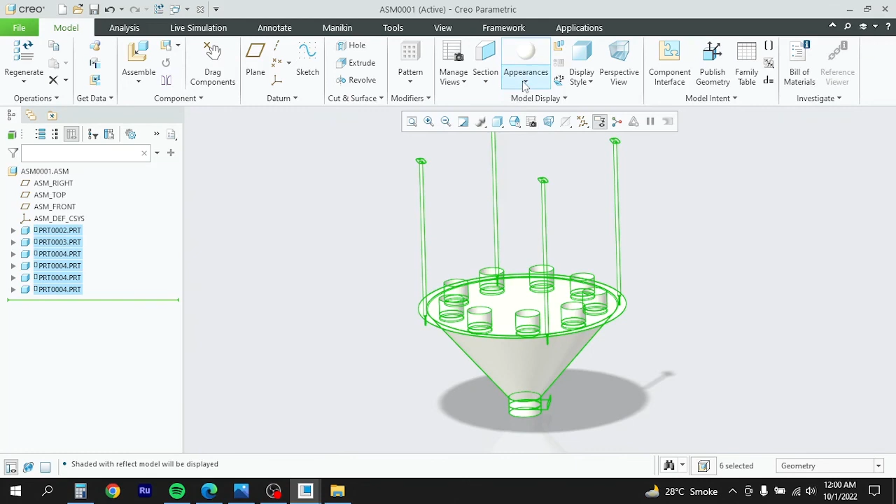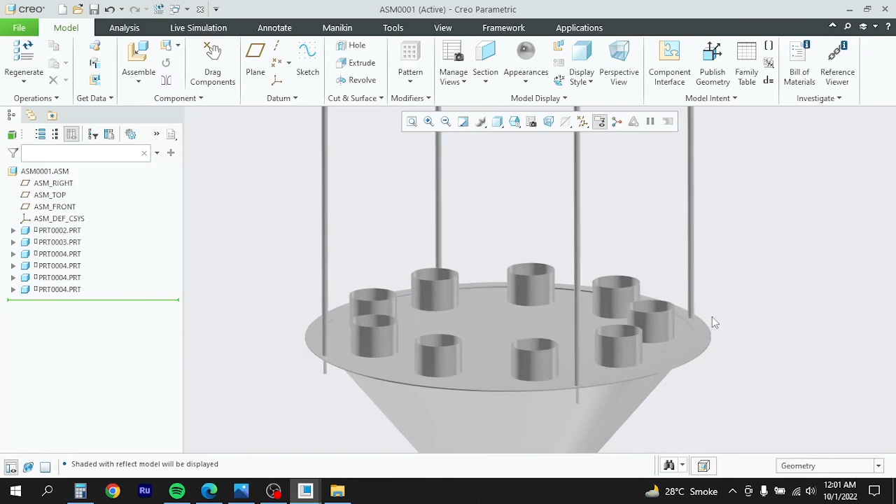Further we can change the appearance here. If I wanted to make it, let me choose this all and change the appearance to this one. I can change it with reflections, and then I can choose again this all, and I will change again the appearance. Okay, so let me again choose this all. Okay. Okay, so this looks better, and I think this is okay. So that's all for today.